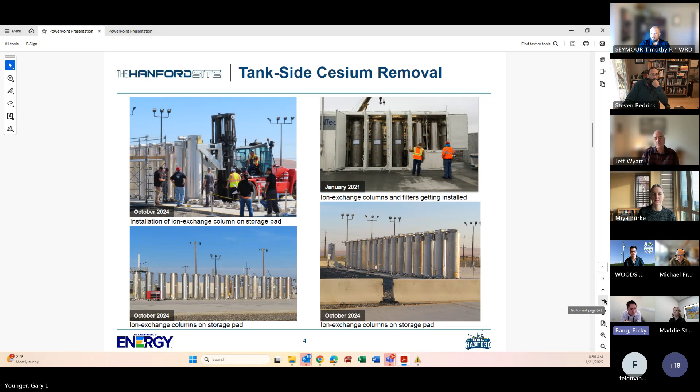So again, about 800,000 gallons processed through those 19 columns or so. But the testbed initiative, if we go back to slide 5, that had, if we look at the upper right, a pump that fits into a riser that then gets installed into the tank. That riser might be about only 1 to 2 feet wide. So it's a much smaller column, almost a one-and-done type application for this.

So we'll have to evaluate, once we get the sample results, we may be able to tell what was removed with the column there.

And then also see what kind of state the equipment was in once we are able to remove the equipment. So, Michael, I think I do owe you some information about resin performance and the volume it took to remove the radionuclides we're talking about.

The primary concern with a zeolite absorption column, I believe, is particle plugging. So is there a micron filter ahead of this? Yes, on both the tank side cesium removal and the testbed initiative, there was a filter, and specifically on testbed initiative, tank SY101 was allowed to settle to avoid any solids.

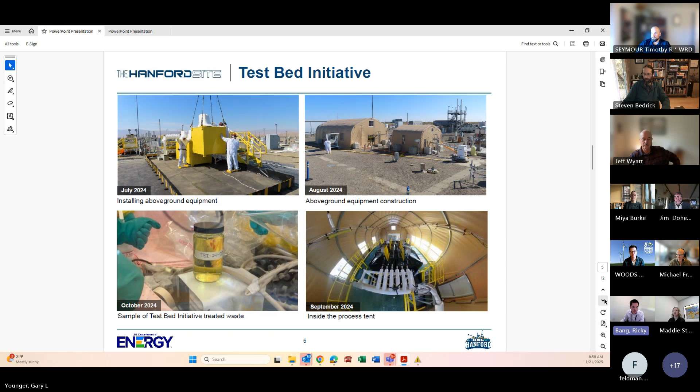In addition to tank waste treatment, another big part of our tank waste operations is single shell tank retrievals. That activity is where we remove tank waste from single shell tanks into double shell tanks through our retrieval activities.

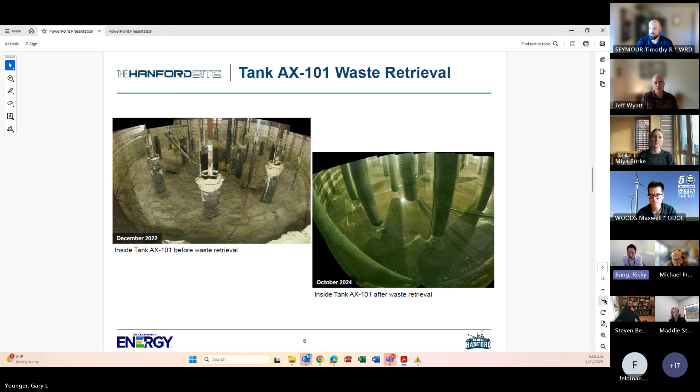I feel like completing a tank farm is a significant accomplishment here. I'll continue with other single shell tank retrievals and can take questions at the end. Next slide I have is after AX farm, right?

The first tank to be retrieved out of A farm is tank A101, and retrievals did start last fall. It had about 350,000 gallons of tank waste in it. It's currently about halfway retrieved, 56% retrieved. That's on track to be completed this fall.

On the next slide, I'll show tank A102. So tank by tank, there are also preparations needed to prepare each tank for retrievals. Tank A102 is the second tank in A farm to be retrieved. Equipment installation started last fall.

Installation, I would say, finished in the December, January timeframe. Testing of the equipment is ongoing right now. That should wrap up within the next month, and then operations of A102 retrievals would also start within the next month or so.

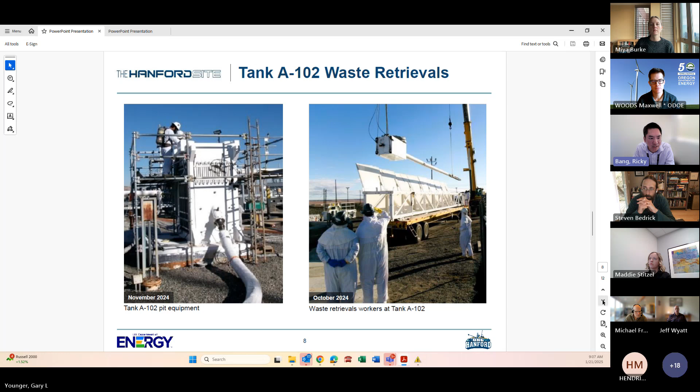All right, I'll go on to the next slide and really wrap up with one more slide, Gary. There we go. Wrap up with kind of the final preparations that we have here at Tank Farms for direct feed low activity waste operations.

There are two facilities that I'll focus on for this update. The first one being the effluent treatment facility. This facility treats the secondary liquid waste that we receive from the waste treatment plant, the 242A evaporator, and other Hanford facilities.

This facility has been undergoing upgrades of its systems and installation of new systems, really to support the pace needed of operations for DFLAW and the Hanford site, right now and for the foreseeable future. We expect to receive more secondary liquid waste than we have in the past, and we've been upgrading the effluent treatment facility to handle the increase in that volume. So the last set of upgrades was completed this past fall.

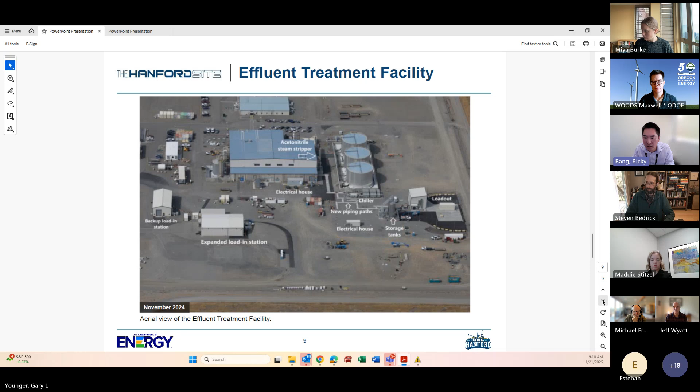Okay, we'll go on to the next slide. And so what I also want to show is just a couple of photos of the facility, of the systems inside or next to the facilities as well.

And then we'll turn those over to operations to support WTP operations. I will add that currently, in parallel with the testing, we did start a new processing campaign at the effluent treatment facility, to reduce the volume in the liquid effluent retention facility, basin number 43. That will reduce the volume there for continued operations at the 242A evaporator. The target for that campaign is about 3 to 5 million gallons. So good to have ETF up and running and processing millions of gallons each and every year.

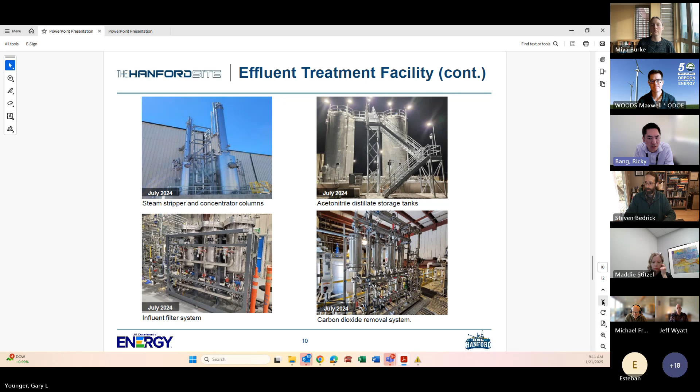I just want to touch briefly on the 222S laboratory. This is an operating radiological laboratory at the Hanford site, has been operating for decades now. This past year, it's processed about 1,000 samples for the Hanford site, many from the tank farms, but it does also process samples for our risk reduction activities. This past year, it did undergo some minor upgrades, good upgrades for the laboratory analysts at the site.

There's some room renovations and some analytical equipment upgrades that also occur at the laboratory to continue the rhythm of maintenance needed there, to continue with their processing of radiological samples for the Hanford site each and every year.

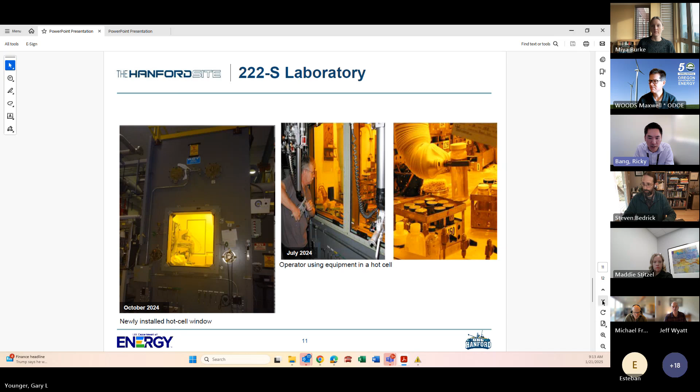And that concludes my presentation, my updates on tank waste operations. From a retrieval, treatment, and DFLAW support update, we've made good progress here in support of all activities. So I appreciate the opportunity to provide an update this morning. Any final questions?

See one from, I'll start with Esteban and then go on to Matt.

Yeah, thanks, Ricky. The big thing and the trend I think in all the presentations you did was that constant learning, and with your final presentation about the laboratory, learning about the radioactivity and what's new. So what's the biggest thing in the ongoing process of this treatment process that you're finding, especially, I'm glad Tom always educates us about the radioactivity and all that stuff I'm not good at, but what would you say, especially within this, the test bed initiative, trying to manage cost and everything and worker safety, what is it that right now is popping out and looking at for your work schedule?

No, I think that's a good question. Between everything that we do, from tank waste treatment, tank side cesium removal, test bed, the retrievals and the laboratory, getting that worker feedback in and improving the technology we have to give the workers the tools they need to efficiently treat tank waste, reduce the risk at the Hanford site, and doing so safely. Worker feedback has been key to all of that.

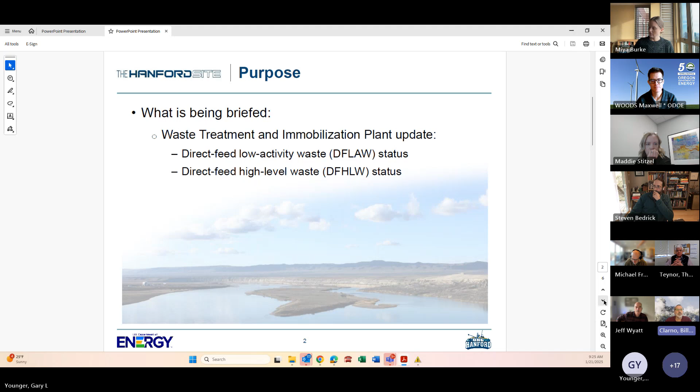Next slide. All right, so what's being briefed today? We're going to brief the DFLAW status, and I'll take that, and then Tom will brief the DFHLW status. So that's our overview for today.

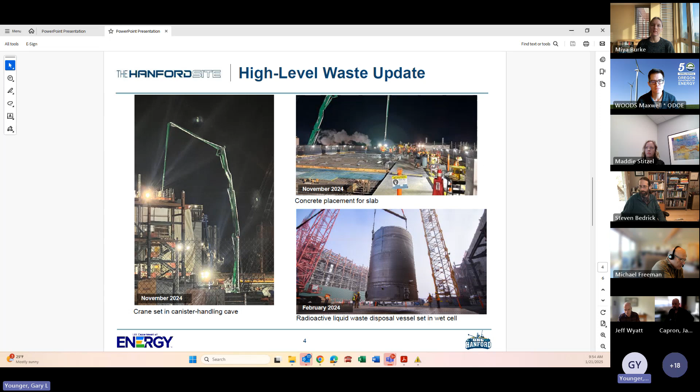Jason doesn't have any slides, so I will stop sharing what I have. And Jason, you're up, my friend. Certainly. Quick sound check. Gary, can you hear me okay? Sound just fine. Good deal. Usually works well in here.

So again, good morning, everyone. As Gary introduced me, I'm Jason Capron, Senior Technical Advisor for our River and Plateau group. This is the group that deals with soil and groundwater remediation, particularly outside of the tank farm areas. What I wanted to give you an update on was our cleanup decision-making efforts for several notable areas, notable because we were expecting they could be coming into the public review space pretty soon, so wanted to be sure you all were aware of where we were at. I tried to strike a balance between the timing of what I have left and giving you enough information. Since some of you I know, some of you I don't, I just want to be sure you have the right context. Feel free to pop in anytime with questions across the three topic areas, and I'll do my best to keep an eye out for raised hands.

So let's just start with 300-296. That's the designation for the waste site underneath the 324 building. This is a waste site where there's high activity material present. I believe you all have some background and awareness of it, so I won't give too much exposition.

What we've been doing in the past year is developing a focused feasibility study to evaluate a modified remedial action approach for remediating the soil underneath that building. In a nutshell, the approach previously envisioned was that all the material requiring remote excavation could be excavated through the building floor. As we got more information last year, we didn't think that was fully the case. We were expecting that at least some portion of remedial action would have to occur once the building came down, which wasn't quite in line with how it was originally envisioned.

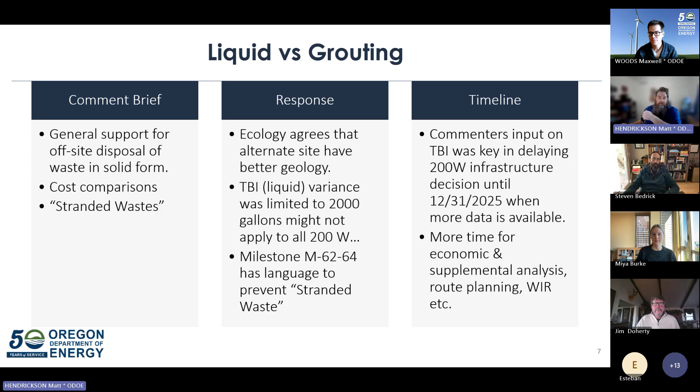That flows into the offsite disposal and transportation. A lot of comments were received on this. Again, many people think it's a lot safer to transport that solid material, and that there wasn't enough time to make an informed decision. DOE did commit to using all applicable regulations when shipping, that is, DOE would work with DOT and the NRC and any other applicable regulations when they need to finally pack this and ship it.

They did move it back, and again, we expect September. You might notice a theme, we're hitting September on a lot of this. It's going to be a big time for OHCB and us.

There's something also very interesting that came out of the holistics. There is a new Hanford life cycle scope, schedule, and cost report expected this year. It will include many of the things that were in holistics, and this will be an important document for us to look at. I would expect that we will inform the board as soon as we have access to that document.

So this is just in general for infrastructure. It covers all the tanks, all the cross-site transfer lines, the leakers, what the budget would be. So this was a very large aspect for people to comment on, and it's quite variable what we saw there. Many agreed with the new 1 million gallon capacity in 200 West, although some thought it came too late. Same with the transfer lines, getting those in service sooner rather than later, and making sure that you obtain budget for that.